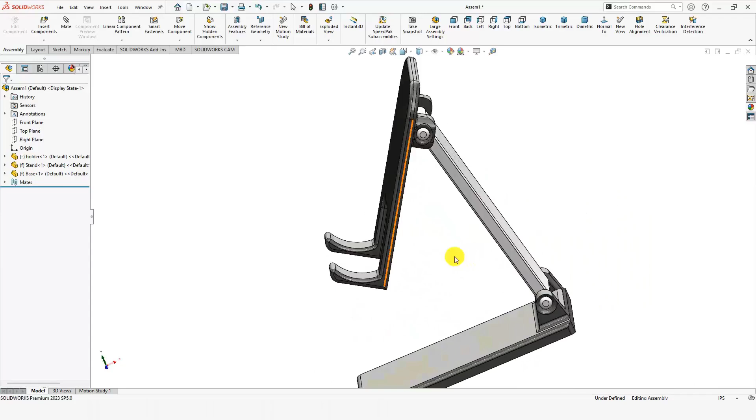Welcome to this video. In this video we will be making this mobile holder stand. We will make all three parts and then assemble it like this. So let's begin - first we will make the base part of the mobile stand.

So let's start. You need to open a part file, click OK, and specify the units. I'm specifying it as mmgs, millimeters.

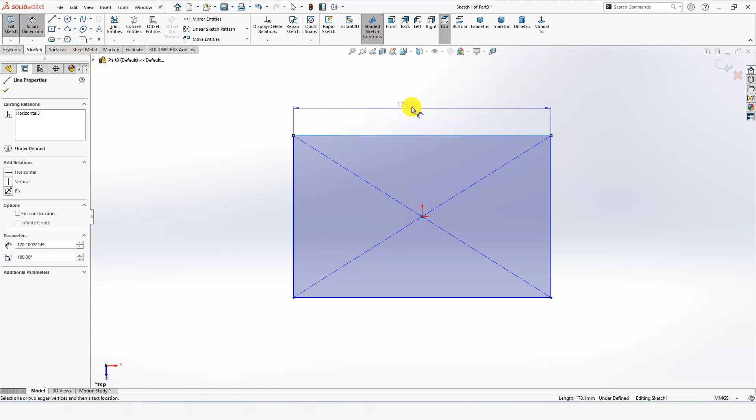Select the top plane, click on sketch, select a center rectangle from here, and make a center rectangle at the origin like this. Now select the smart dimensioning tool, specify the length of this line as 170 millimeters, and the length of this other line as 45.

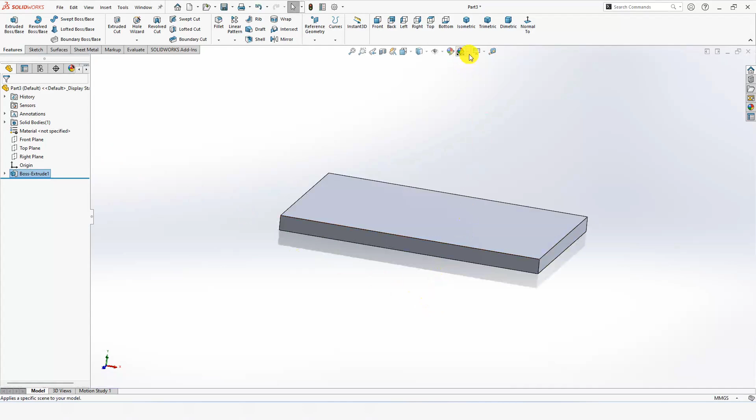Then go to features, select extruded boss base, and specify the thickness. Check this green button, change the background to plain white, and specify some appearance - high gloss plastic. I think this color would be fine.

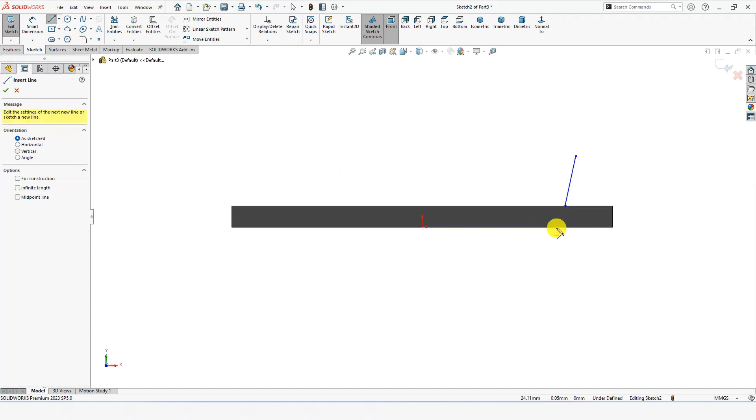Now select this face, click on sketch, and make an inclined line here. Press escape, select line again, and from this corner make a line at this inclination. Now select center line and make a center line like this.

Now select the smart dimensioning tool. From this point to the center line, specify the distance as 5 millimeters. Press escape, press control, select this point and this line, and make the relation symmetric. Press control again, select these two points, and make the relation horizontal so they are in line.

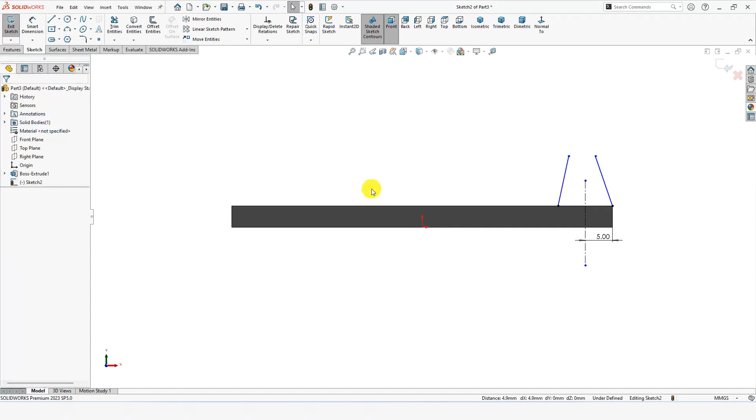Now select this 3-point arc - first, second, and third point. Select the smart dimensioning tool again and specify the radius of this 3-point arc.

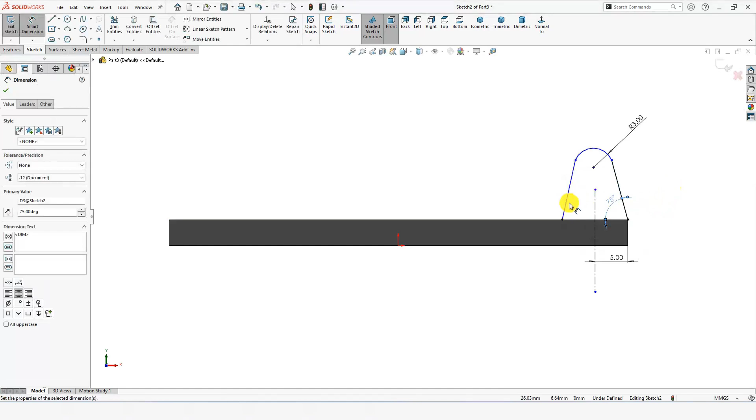Then specify the inclination of this line with respect to horizontal as 75 degrees, and similarly 75 degrees for this one. Then from this point to this line, specify the height. Okay, so the sketch is fully defined now.

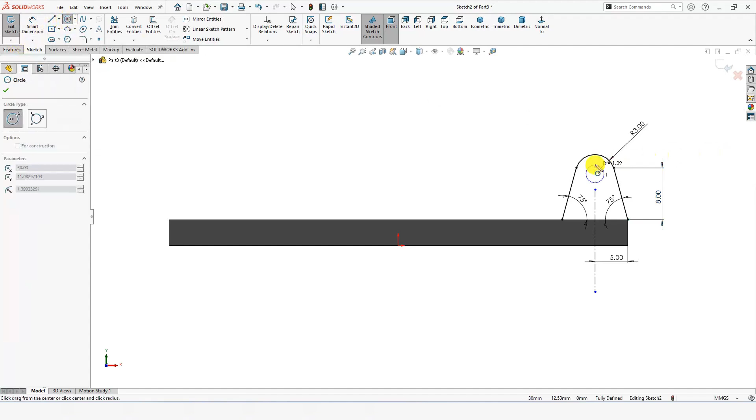Now make a circle here and specify its diameter as 4 millimeters. Then go to features, extruded boss base. Okay, so this sketch is not completed.

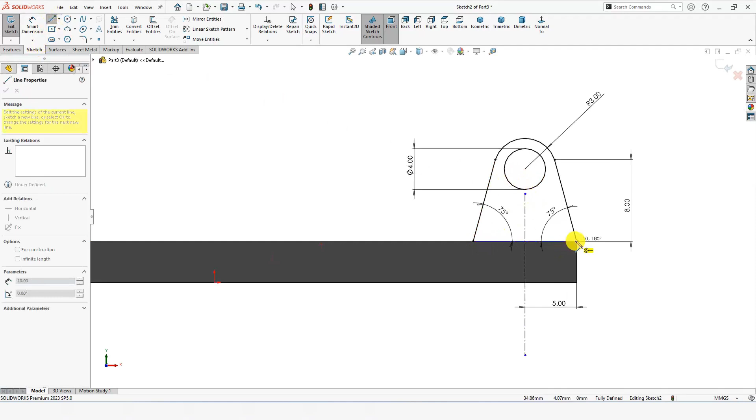Let's go back. This sketch hadn't turned gray because it wasn't complete, and now it's complete - we made this line and now the sketch has turned gray. Now extruded boss base, and here you'll probably learn something new.

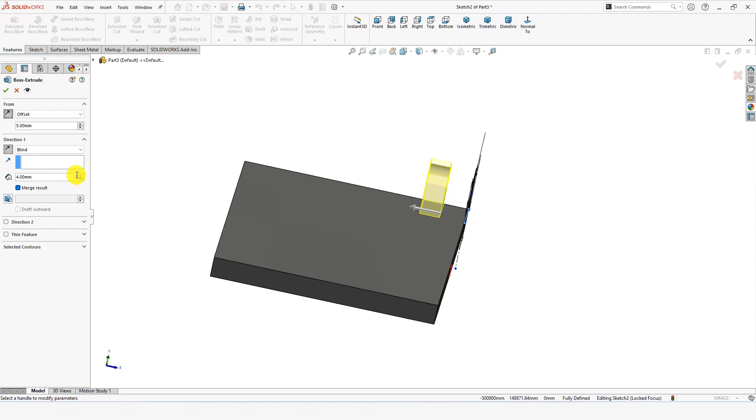In this direction I want to extrude at some offset, so specify the offset distance as, let's say, 5 millimeters, in this direction. Click here, right, and now specify the extrusion length - I think 35 millimeters would be best. Okay, check this box, and here we go.

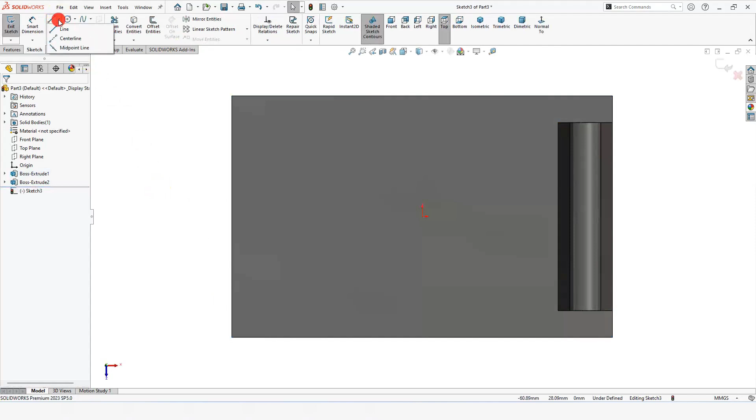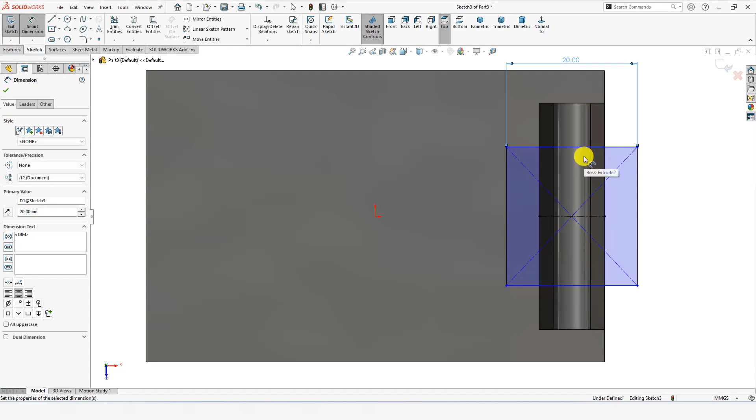Now select this face, click on sketch. We want to cut at some offset again, so select a center line, trace the center point here, and make a center line from here to here. Now select center rectangle, trace this midpoint, and make a center rectangle like this. Now select the smart dimensioning tool and specify the length of this line as 20 millimeters, and this one as 22.

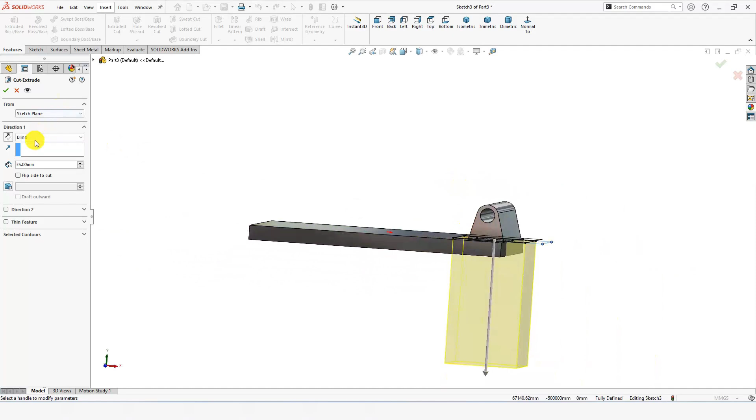Here you'll learn something new again, because I want an extruded cut but at some offset distance. Select extruded cut, and let me explain the right orientation. Actually I want to cut this at some offset distance, so let me just - okay, this is the offset, and using this arrow, at this level I want the extrusion to happen.

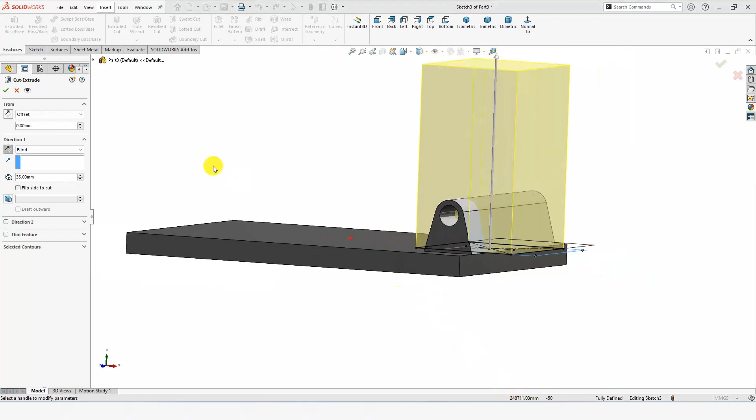For that we have to specify the offset distance like this, right? I think this distance would be fine. Check this box, and here we go. Although we didn't make the sketch on this level, by using the offset we can still do it.

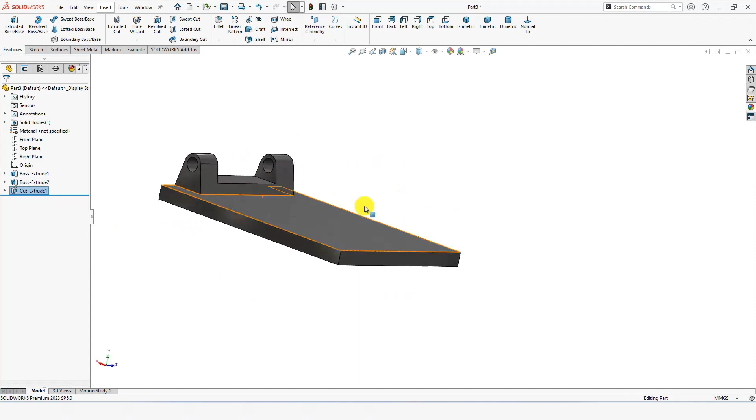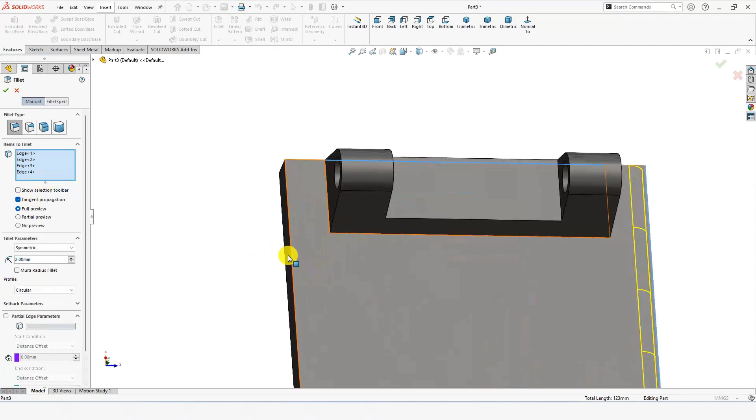Now select the fillet command. Here you need to specify the fillet parameter - this is too much, so let's reduce it. Now select all of the sharp edges and corners. This one isn't going to be selected, so let's clear it. Any entity that isn't allowing selection, just clear it.

I'm just making the video faster, increasing the speed, because you can do this part yourself. It's easy - just select the corners and edges. Any entity that isn't allowing selection, just deselect it.

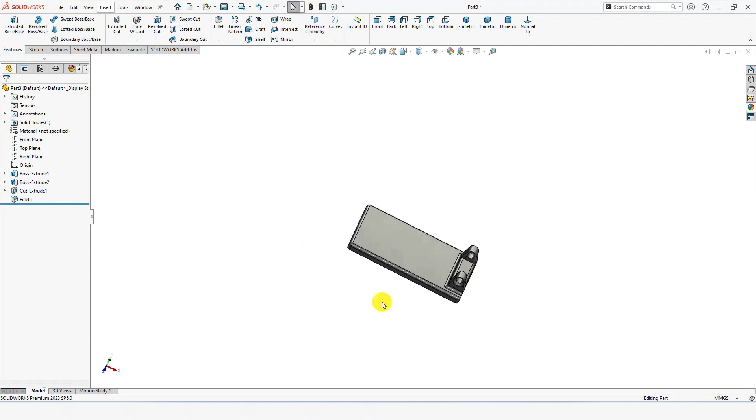And here we have our first part ready. You need to save this part, and I am saving it as base. So we are done with our first part, and now we will start making the second part for the mobile stand.

Now it's time to make this part - this is the stand.

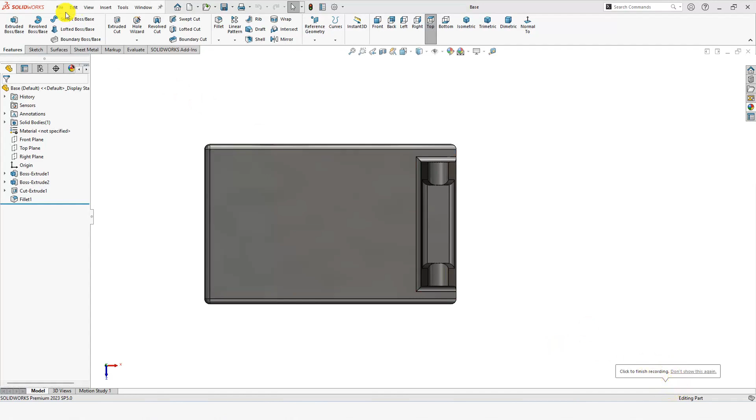Click on file, new file, open a part file, click OK. Make sure the units are millimeters, mmgs.

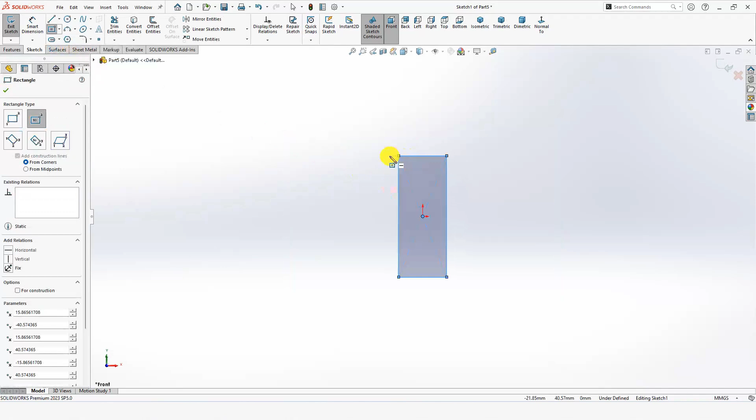Click on this front plane, click on sketch, and select a center rectangle. Make a center rectangle at this origin like this. Now select the smart dimensioning tool, specify the length of this line as 22 millimeters. Press enter, select the length of this line, and this should be 35.

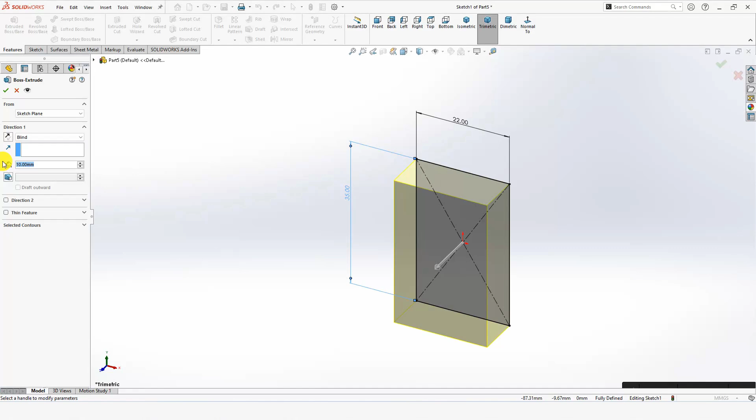Go to features, select extruded boss base, and specify the length of extrusion as 4 mm. Change the background to plain white. Let's specify some appearance, plastic, and this looks fine.

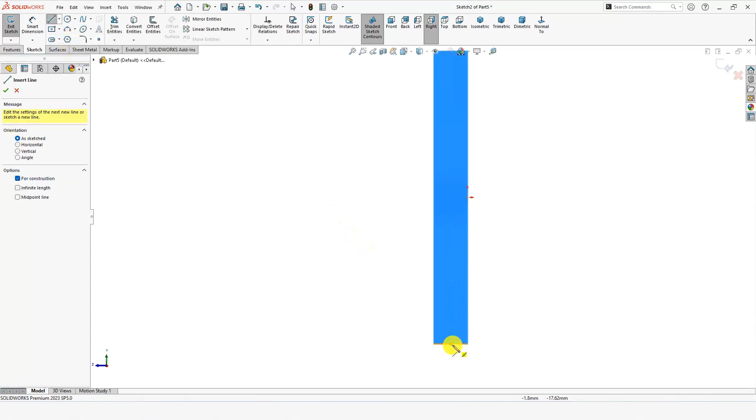Select this face, click on sketch, and make a center line here. Press escape. Now select a circle and make a circle here.

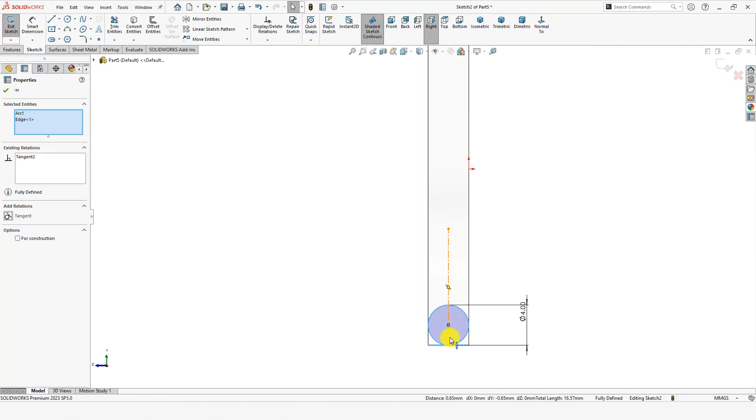Select the smart dimensioning tool, specify the diameter as 4. Press escape, press control, select the circle and this line, and make a tangent relation. Now select extruded boss base, and specify the length of extrusion as 6.5 millimeters.

Okay, now check this box, and now we have to mirror this. So let's select mirror.

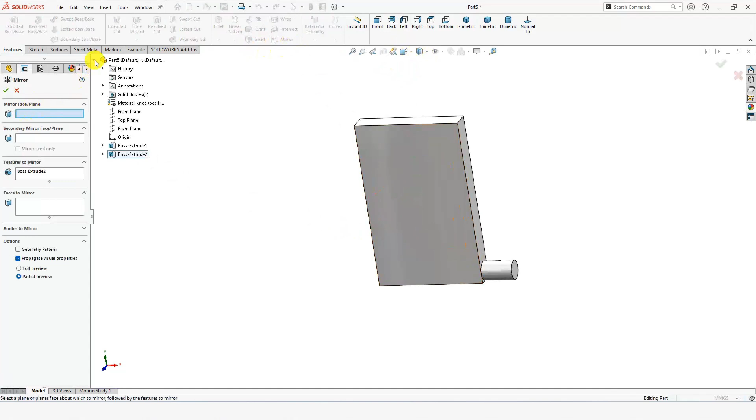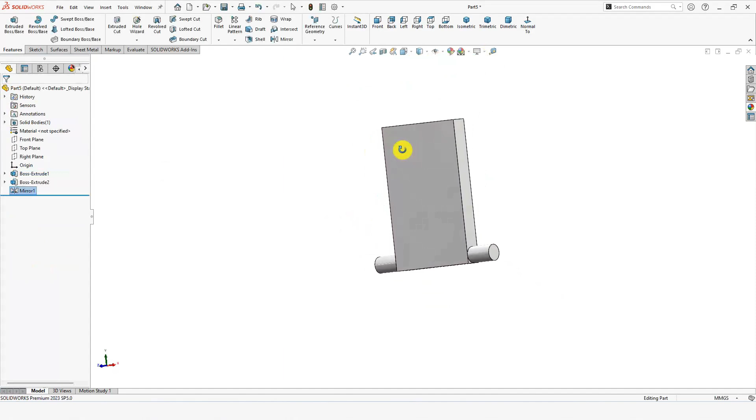Here we need to specify a plane, so this plane should be selected, this one. This is the right plane in my case, and here we set the feature to mirror, full preview, and check this box. So we have mirrored this cylinder to the other side, and now it's time to make a plane.

In reference geometry, select a plane, select this surface, distance 0 millimeters, check this box, and now we have to mirror, so select mirror.

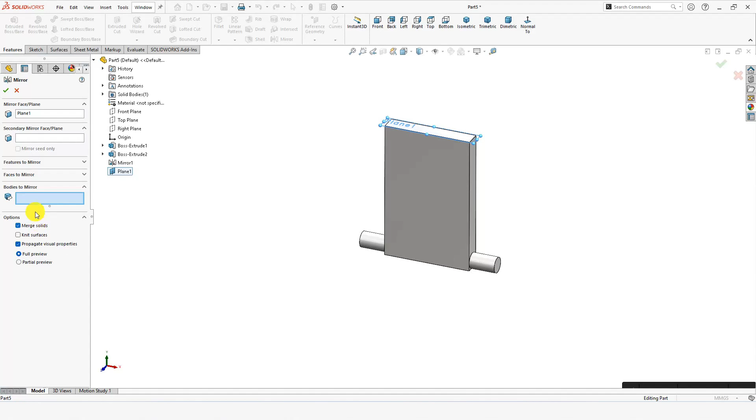If anything is selected, just delete it. Select this plane, and I want to mirror the body, so here is bodies to mirror, and simply select this body, and here we have the mirrored body.

There is now full preview, so that's fine. Check this box. Now hide this plane.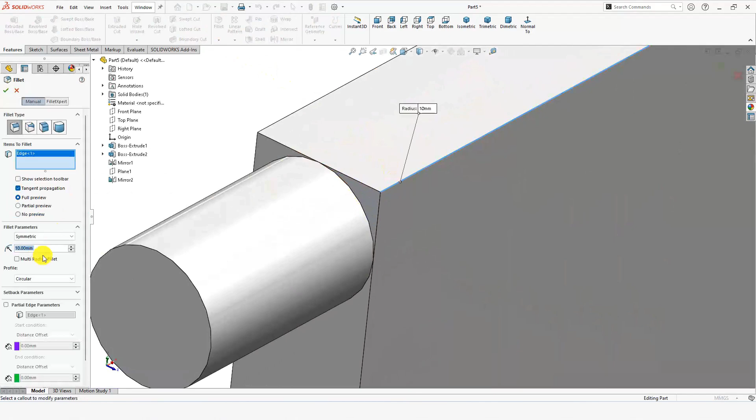Now we are left with the fillets. So select fillet tool, select this line, and specify the fillet parameter. This line is not able to be selected, so just delete it from here. Now fillet the other side, this one and this one.

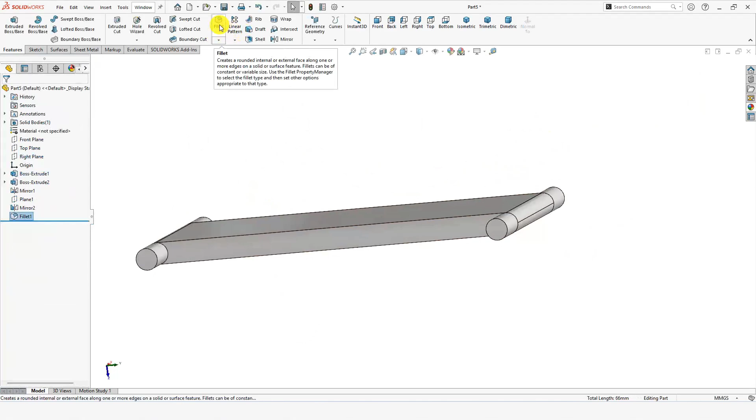Check this box. Now select fillets again, and now I'm speeding up the video. You can fillet it by yourself, it's simple.

And here we are almost done. So now save this part as 'stand', or you can name it according to yourself. Now moving on to the third part, this is the final part.

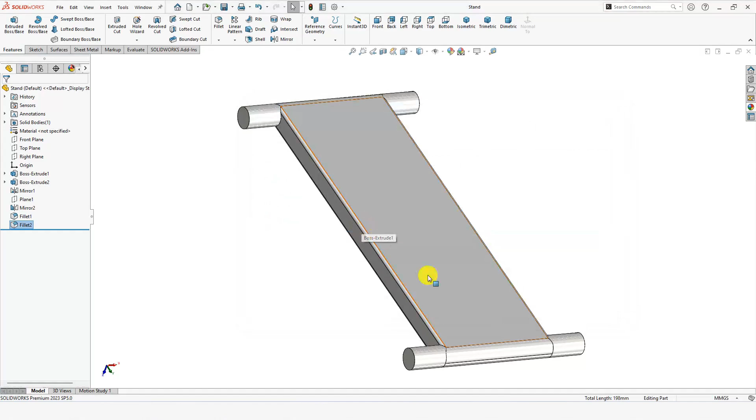Now open a new part file, click OK, change the units to millimeters, and then change the background to plain white.

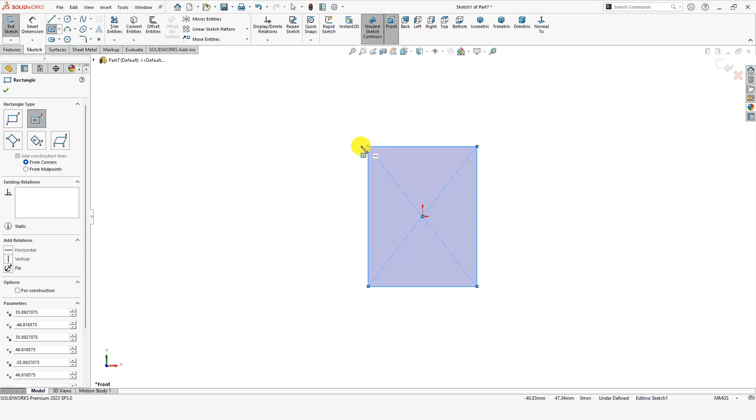Front plane, click on sketch and make a center rectangle at this origin. Now specify the dimensions for this line as 50 millimeters, and this is 60 millimeters.

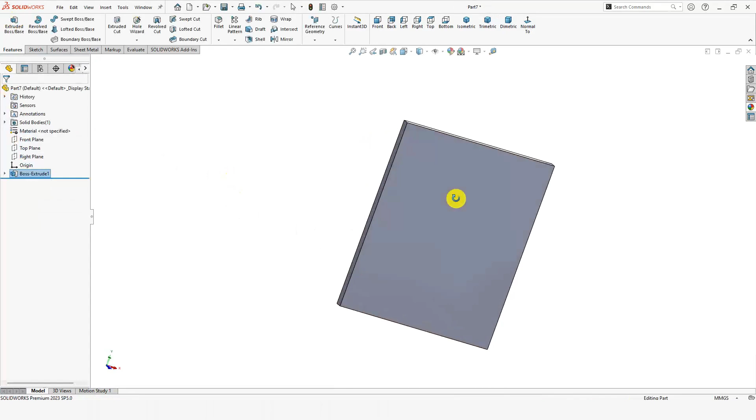Now go to features, extruded boss base, and change this to blind. Specify the thickness as 3 millimeters. Check this box. Now select the surface, click on sketch, make a corner rectangle.

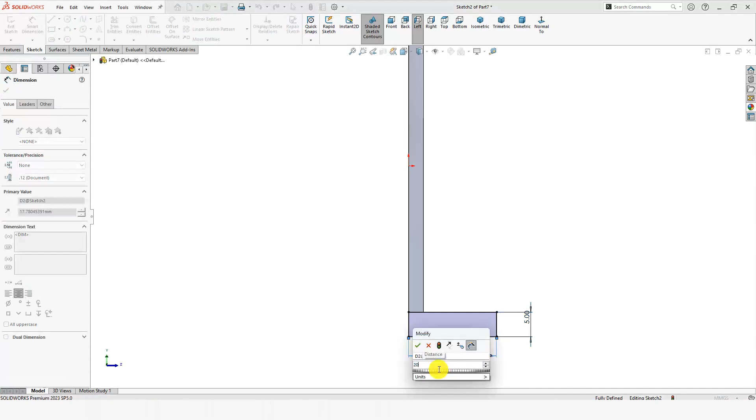Select here corner rectangle, make a corner rectangle like this. Now specify the dimensions of this rectangle, the thickness of this rectangle, and the length of this rectangle. Now go to features, extruded boss base.

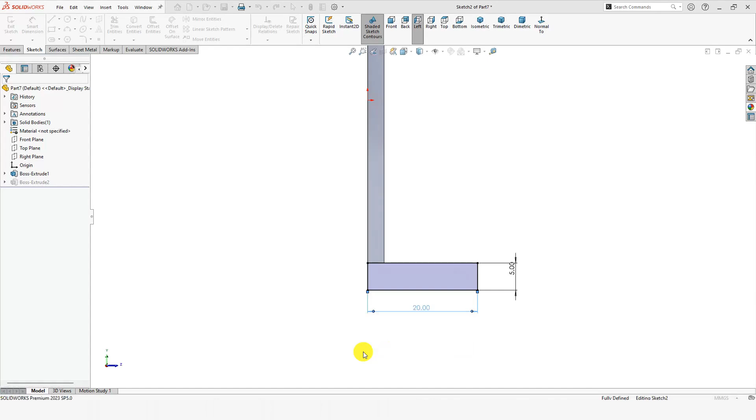Here specify up to surface and select this surface. Check this box. Now add a sketch, let's change it to 18 millimeters. Now this looks fine, exit the sketch.

Now select this face, click on sketch, and select center line and make a straight center line here. Now specify the dimension of this line as 1 millimeter.

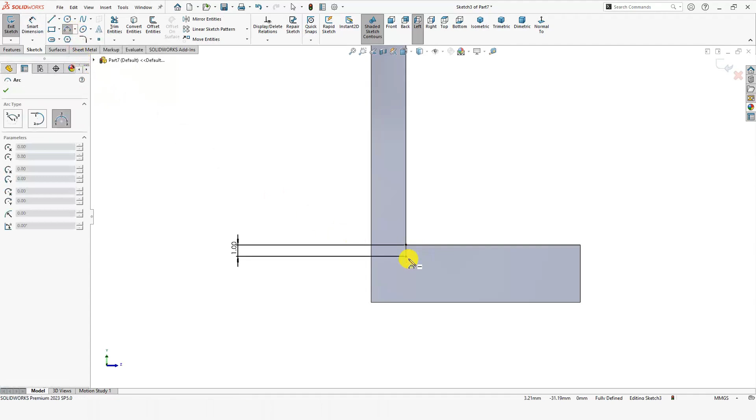Now select the 3-point arc from here, and this is the first point, second point, and the third point. Smart dimension, press escape for now.

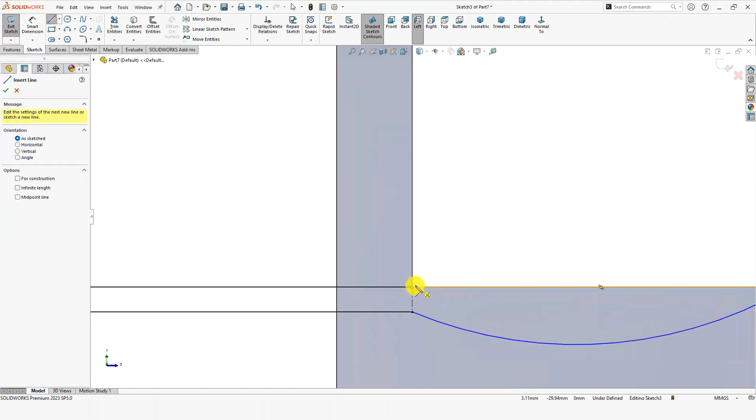Select the line tool, make a line here, and make one more line from here to here. Now the sketch has turned gray, and now specify the radius of this 3-point arc as 14, change it to 13.

Now that looks fine. Go to features, extruded cut, and through all. Check this box.

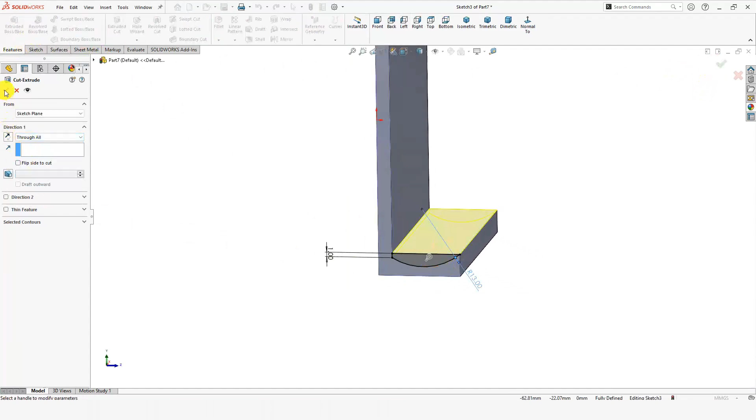Okay, now select this face, click on sketch, and make a center rectangle here. You need to trace the midpoint, so this is the midpoint. Make a center rectangle like this.

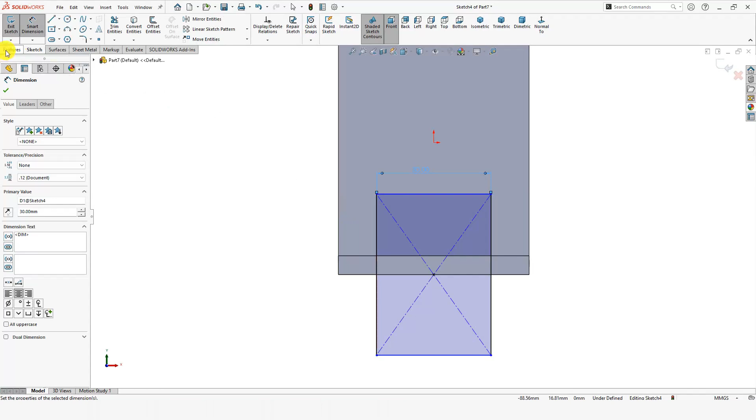Now specify the dimensions, this much is fine. Now go to features, extruded cut through all, specify here through all and check this box.

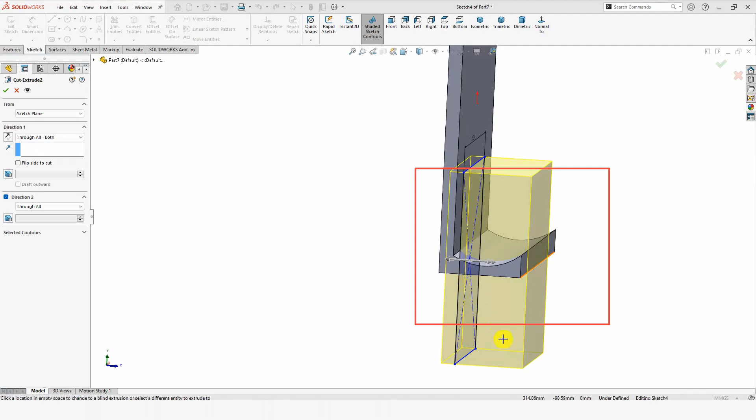Right click here, edit features, through all both, because we want to cut on both sides. This whole area should be cut out. Now check this box, and here we go.

And now it's time to specify some fillets. So select fillet. Now select this corner, this is too much probably.

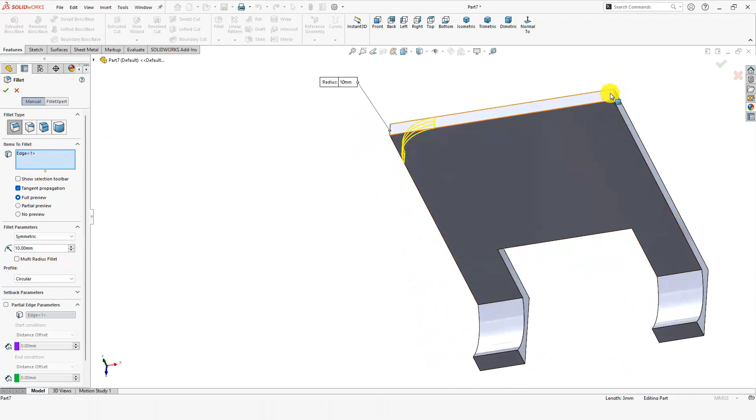Select this face or corner, delete it. Select this corner. For these edges, this much fillet is fine.

We need to reduce these fillets to 5 millimeters. Check this box, and I am just speeding up the video, and on these edges definitely the fillet parameter should be smaller.

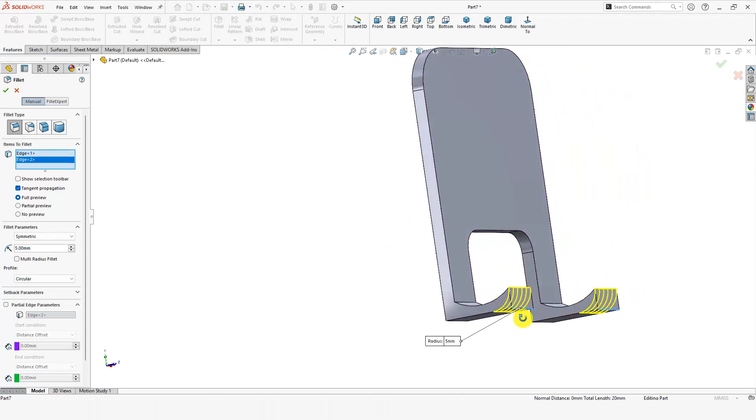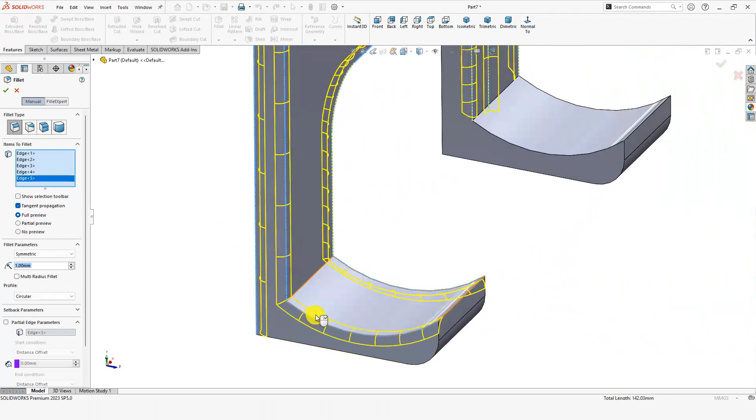Specify the fillets for these edges. Again, this would be much shorter fillets, and make sure you specify each corner a fillet. So I'm quickly doing it, and fillet on the back side as well, this one. There should be no corner, no sharp edge.

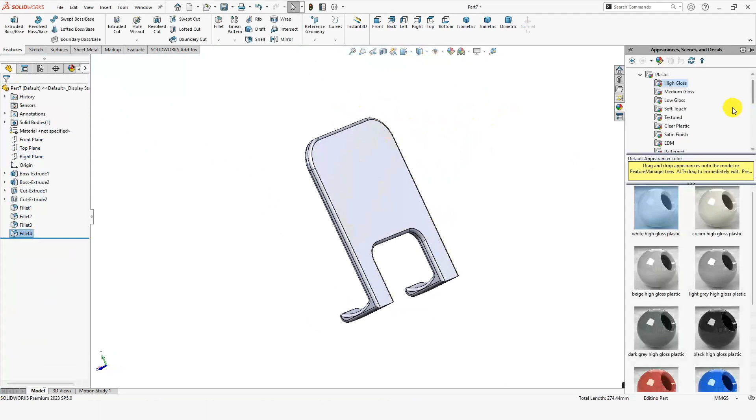Now check this box and let's specify some color. So this color is fine. And our 3 parts have been completed, and now it's time to make the assembly.

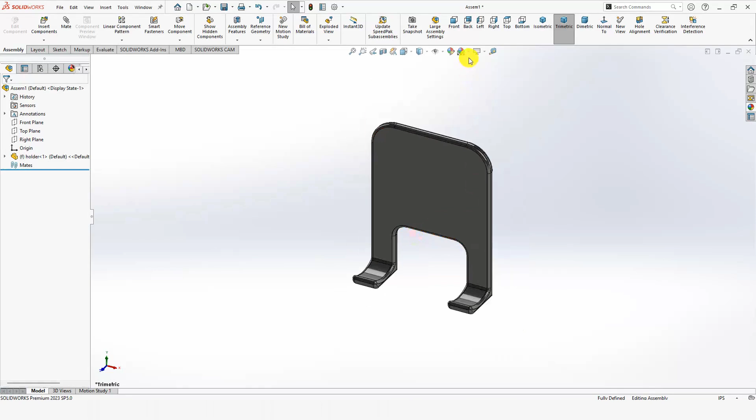So let's save this file, name it according to yourself, and select here make assembly file. As soon as you click here, this part will automatically appear here. Now insert components and insert both of these, base and stand, here.

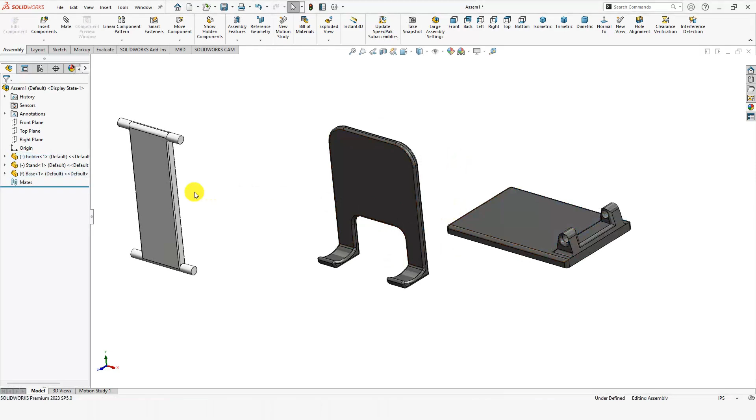Let's change it to float and let's change it to fixed, because I want the base to be fixed and the other part to be floated. Okay, so let's forget about this third part, and now let's assemble these 2 parts.

Rotate this vertical stand and now click on mate and select this inner bore, this one, and this cylindrical area. Check this box.

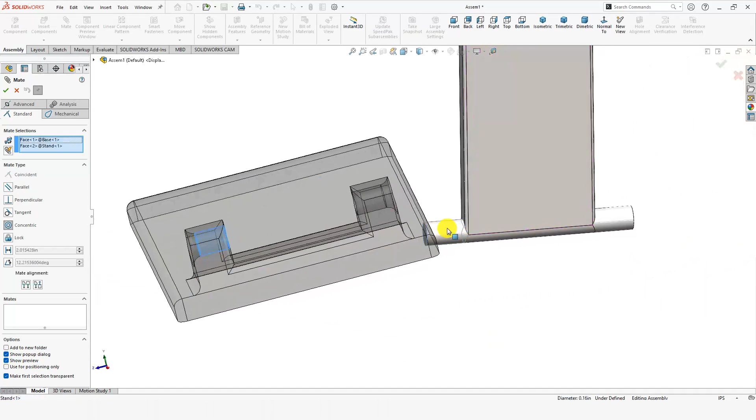Click on mate again, and this time go to advanced mates and width mate, and in this window we need to select these 2 faces, and in the next window we need to select this face and this face. So now width mate has been applied, let me show you how it's gonna work.

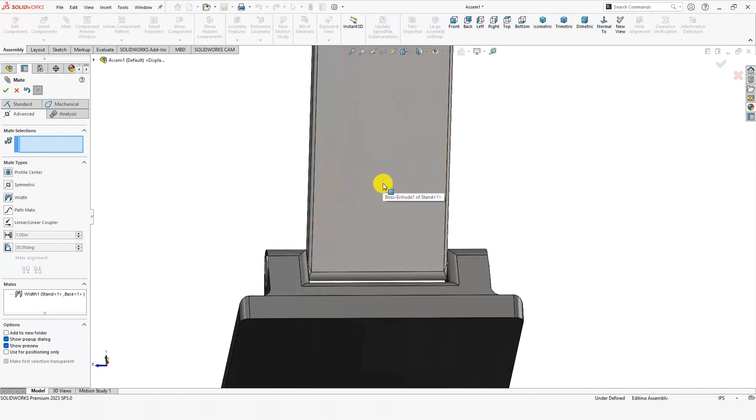You can rotate it like this. And now let's assemble this one. As I forgot to make a piece here, so open it from here like this.

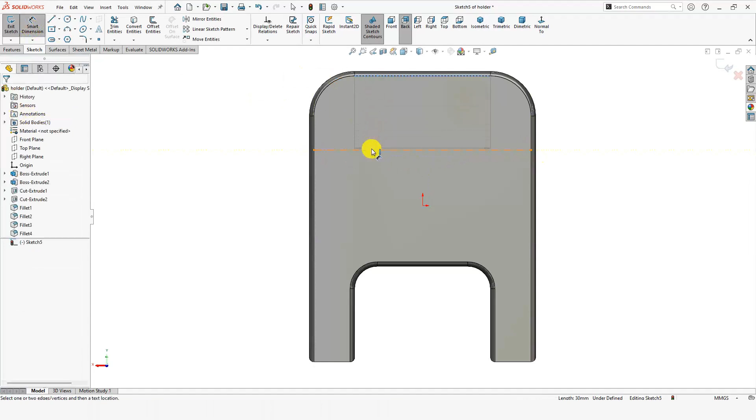Now select this face, click on sketch. Let's make a center rectangle here. Now let's specify the distance from the corner as this much is fine. Now let's select the center rectangle here, trace the midpoint and make a center rectangle like this.

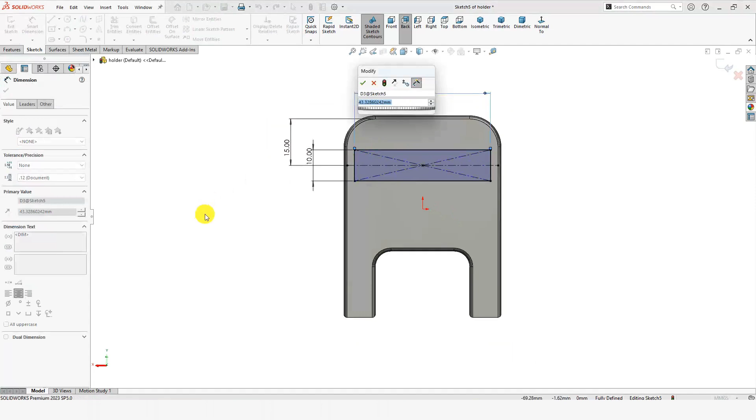Now let's select the smart dimensioning tool, specify the dimensions and the length as well, 35 millimeter is fine. And now go to features, extrude boss base, change it to blind, and let's assign the parameter.

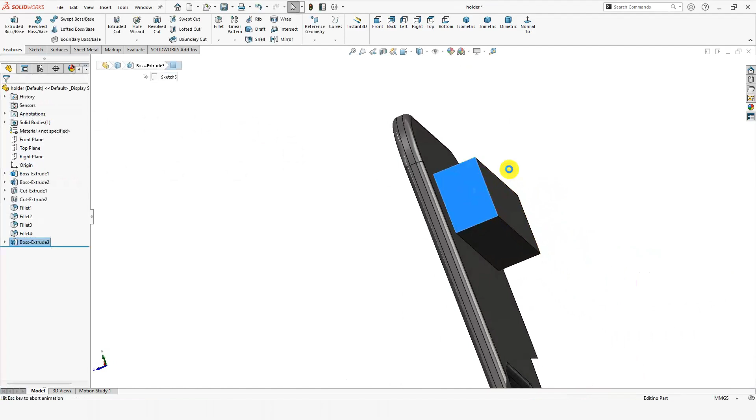Then check this box. Okay, this is fine. Now select this face, click on sketch, and then make a center line, trace the center point here from this center to this center, and then select the circle, make a circle at the middle. The diameter should be 4 millimeter because rest of the diameters are 4.

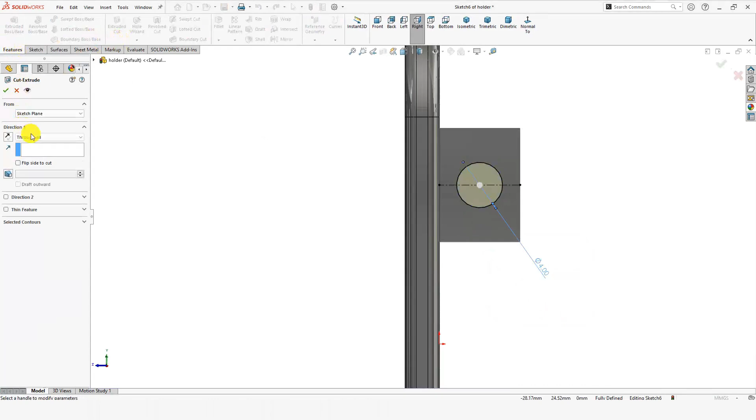And now extruded cut through all, and now apply some fillets. So select the fillet tool, this face fillet parameter is small, so make it somewhat bigger.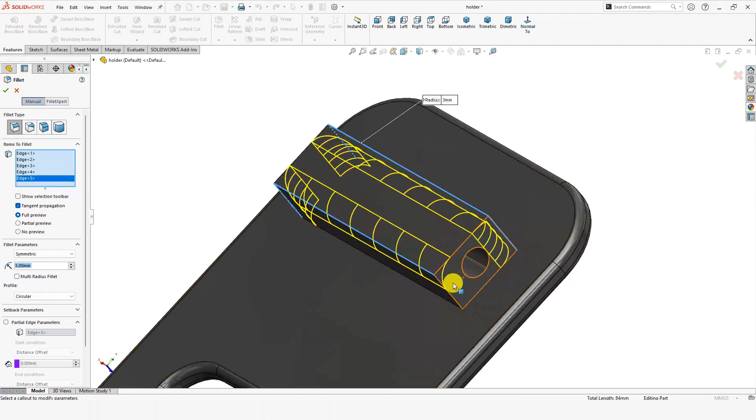Select this corner, this corner, this corner, and similarly the other side. Then check this box, again select fillet, and we will reduce the fillet parameter. Select this edge, check this box, select the fillet again, and fillet these holes as well because I do not want any sharp edges. So that looks good now.

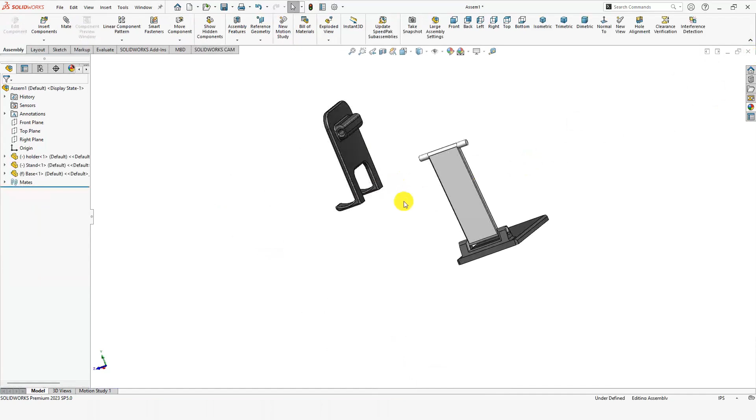Press Ctrl S and close it. Now it will automatically open, and just open this in a separate file, and let's apply some fillets here. Okay, now press Ctrl S and simply exit.

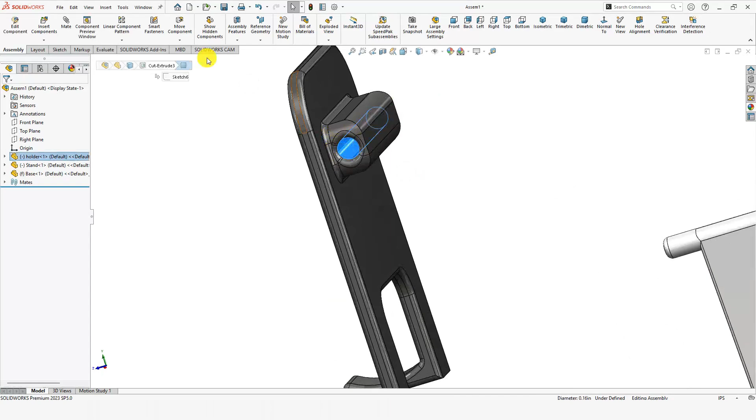Now select this hole, click on mate, select this cylindrical face, check this box, and now we are going to do the width mate. So just delete it, go to advanced and width mate.

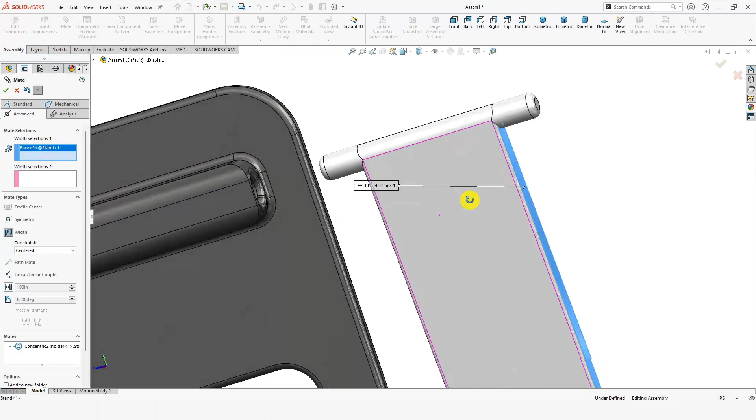If anything is selected, just clear, select and delete. In these two windows, only the opposite side should be selected, so this side and the opposite side, and in this window this side and its opposite side. So that's how we apply the width mate. It's a great tool in SolidWorks.

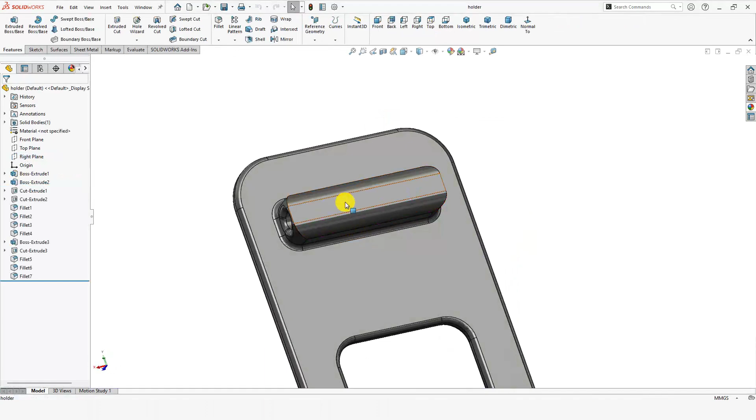So here I can see a problem, so let's open this black part, the holder part. Now select this face, click on sketch, and here make a center line, trace the center point from center to center, make a line like this, and now make a center rectangle here and specify this length as 22.

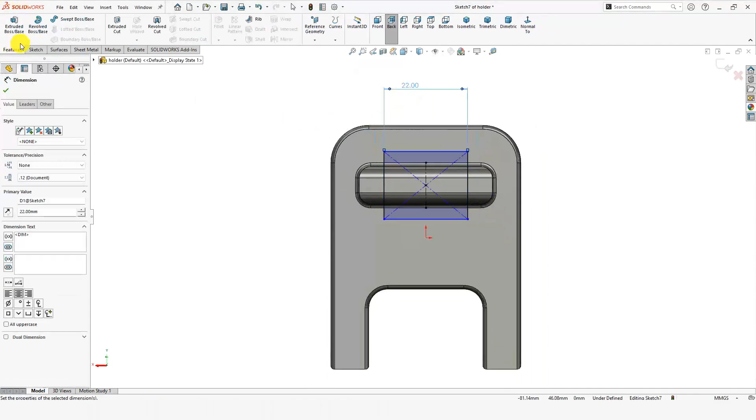And then go to feature, select extruded cut, change the direction from here because I want this upward direction, and check this box, and here we go. And now I think the overlapping issue is solved.

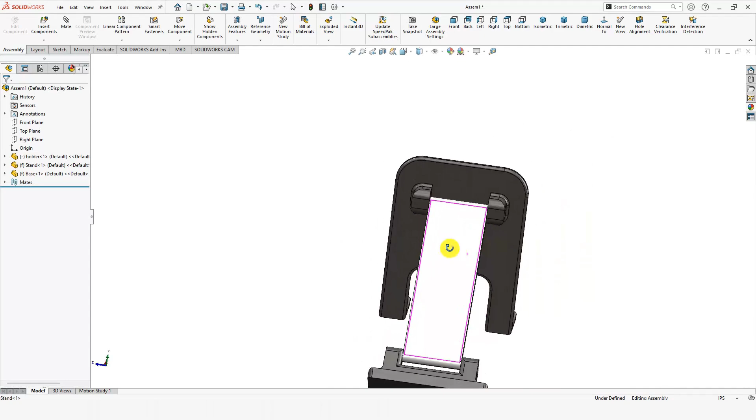Let's close this one and open in the assembly file. Make sure to press Ctrl button first, and now this looks good. You can rotate it, you can check it. Let me rotate it for you.

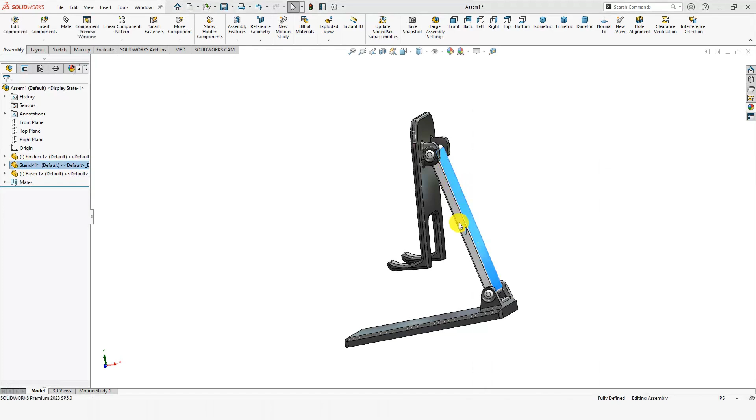This one is working fine, and now let's fix this one and make it as float. It's not working. Make both of these float. So this one should be on float and the black one should be on float as well. So now they will move like this.

Perfect. So this was the video on how to model mobile holder or mobile stand.